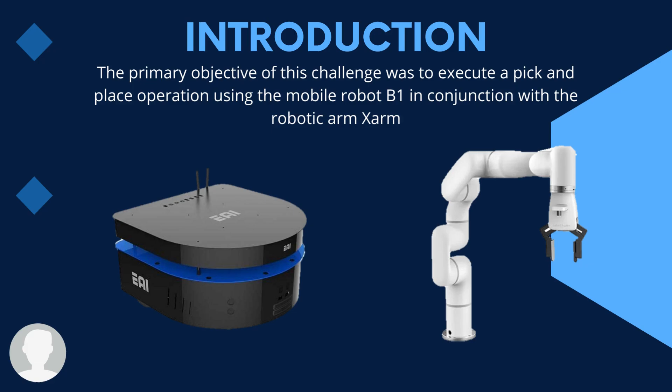The pick and place operation was performed using the mobile robot B1 and the X-arm robotic arm. The process involves the robot moving to the table to pick up the piece with the robotic arm, then moving to the other side of the table to place the piece, and finally having the mobile robot return to its initial position.

In order to deliver a successful project, we adopted a waterfall methodology. We began by designing the fixture and the piece to be gripped. Following that, we proceeded to implement the control for the movement of the robot B1. Afterwards, we defined the motion patterns and finally executed the movements of the X-arm at each required point.

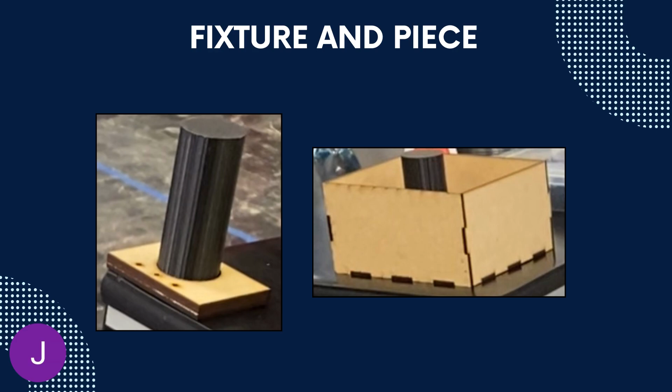In general, the proportional controller, with only proportional action, tends to experience constant errors in the steady state, a difference between the desired value and the actual value, unless a high control gain is used. However, as the control gain is increased, problems related to feedback system stability may arise.

In our application, proportional control was sufficient since the error was small, and the pick and place operation was performed with acceptable accuracy, meaning it could pick up the piece and place it in the correct position.

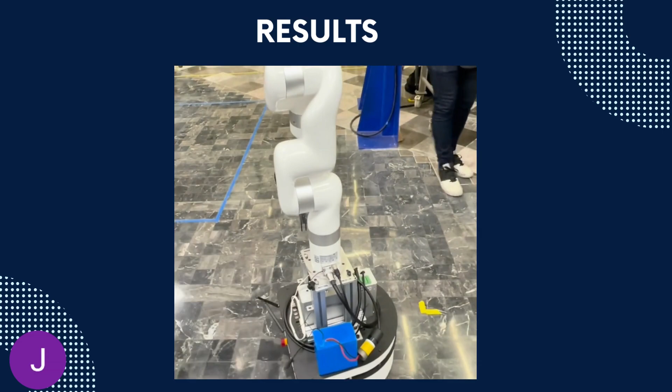Initially, we can observe how our mobile robot starts from an initial position and it must reach the first target, which will be the first table. At this table, the X-arm will perform the pick operation on the cylinder.

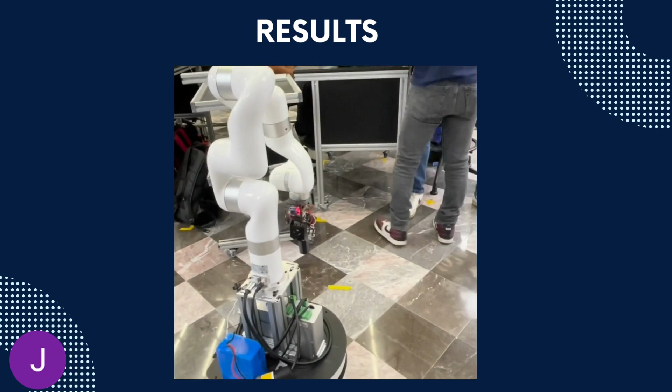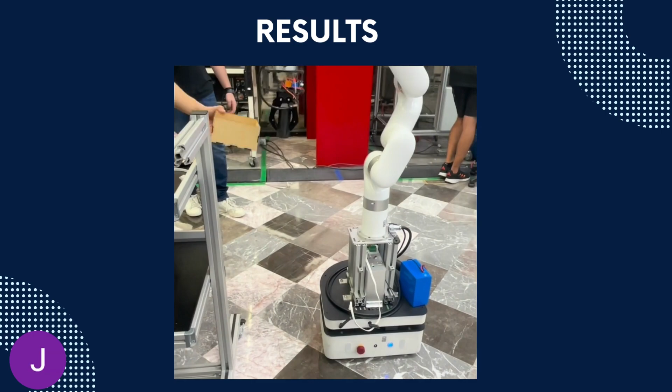Once the X-arm has the cylinder securely held, the mobile robot will continue along the path around the station until it reaches the second target, which will be a second table. Here, the X-arm will be responsible for performing the placement of the cylinder inside the second manufactured fixture.

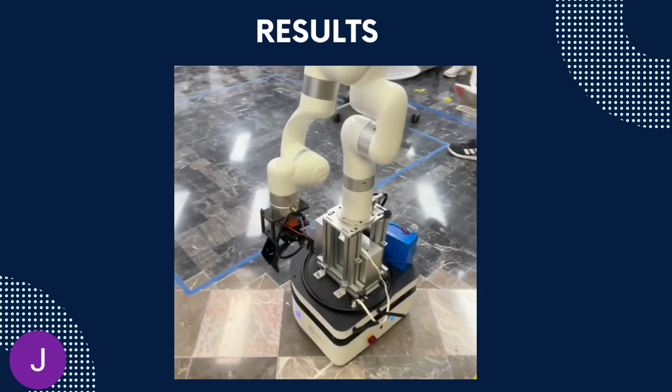Once the X-arm finishes placing the cylinder, the mobile robot will need to return to its initial position, circling the station again, and marking the end of the program sequence.

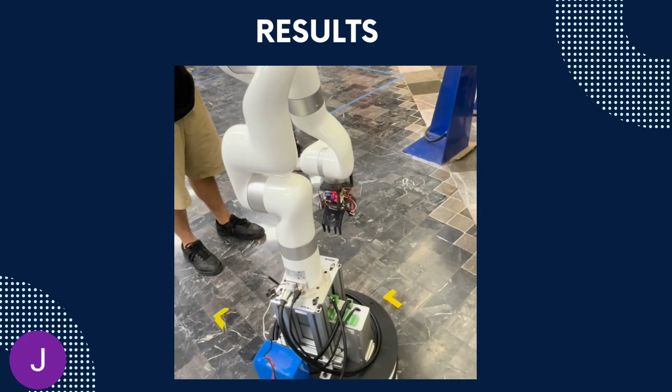It's important to mention that we had to manually position the fixtures near the robot because we were working simultaneously with other teams, which caused the tables to be constantly misaligned, affecting the stored positions in our code.

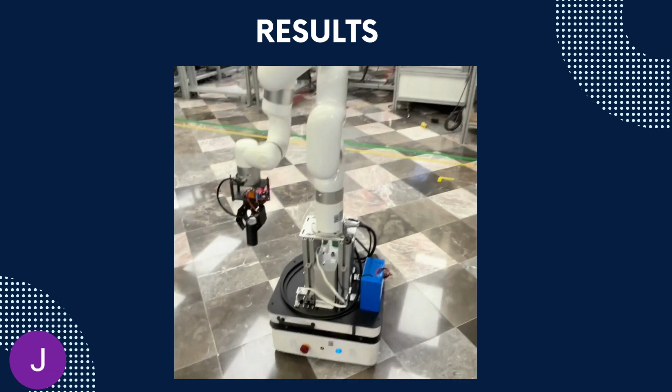Initially, we divided the programming task for both robots, the Dash V1 and the xArm robot, among our team members. Half of the team focused on programming the XARM robot, while the other half worked on programming the Dash V1. Subsequently, we created a script within the Ubuntu software to integrate both sets of programming.

We conducted simulations using the P control method to validate our approach before implementing it on the physical robots. In summary, our P controller experienced an error accumulation, leading to phase shifts in the robot's movements during startup.

Furthermore, the presence of other students in the laboratory rearranging tables created challenges when attempting to return to our original position, affecting precision. While our robot's current behavior is acceptable, there is room for improvement.

Unfortunately, we faced limitations due to time constraints for real simulations and the availability of operational robots, with only two functioning effectively. The advantage of our chosen control method lies in its ease of implementation.

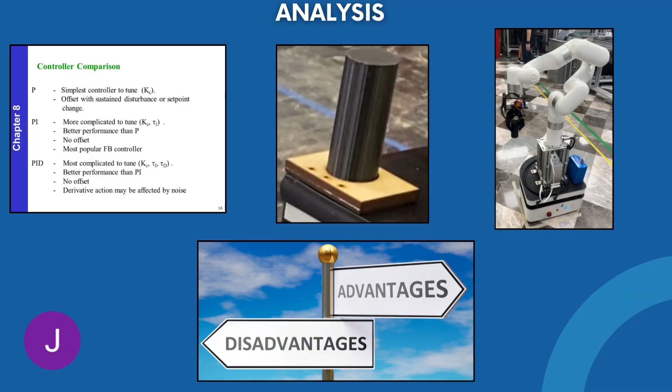Nonetheless, there are notable disadvantages, including the issue of phase shifts in the robot's movement, resulting in less precise positioning. This activity helped us reinforce our understanding of Python and its connection to ROS.

Our system faced challenges due to a controller error and issues with table placement, causing disorganization and synchronization problems in our pick and place operation.

We also encountered difficulties with V1 and V4 when using a larger battery to operate the X-arm, resulting in further synchronization issues. Additionally, working with different robots on different days required repeated X-arm reconfiguration.

We had to record the video in segments due to time constraints, only 2 hours of work per day, and maintenance challenges, but all the necessary steps are documented in the code.